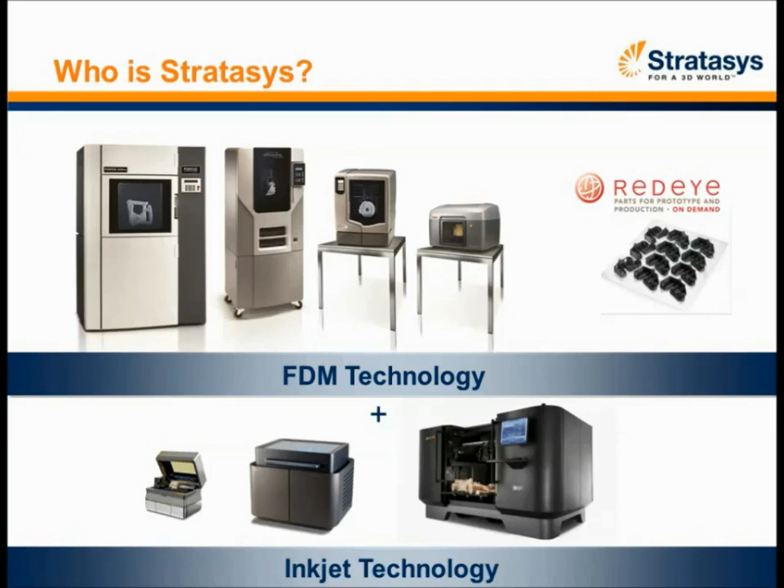Before we get into today's topic, I wanted to give some background about who Stratasys is. For those who may not be familiar, Stratasys makes 3D printers and production systems based on patented fused deposition modeling technology, or FDM, that can produce prototypes and production parts directly from 3D CAD data using engineering-grade thermoplastics. We also operate RedEye On Demand, an online rapid prototyping and digital manufacturing service. You may have recently heard that Stratasys has merged with Objet, also a manufacturer of 3D printers, but they use an inkjet-based technology to create a 3D model.

I'd like to welcome our presenter today, Mr. Duane Byerley. Duane has over 35 years of experience as a senior model maker. In his current role at the Xerox Model Shop, Duane builds everything from complicated multi-plate injection molds and tooling to multi-surface CNC work, welding, and sheet metal fabrication. He's also the in-house advisor of rapid prototyping and machine services. In 1998, they bought their first Stratasys FDM system, and over those 14 years he's been heralded as an industry expert in the field. He was given a Lifetime Achievement Award for excellence in FDM and has been a presenter at the Additive Manufacturing Users Group Conference, as well as SME's Rapid event. So welcome, Duane, we're glad to have you on board for this presentation.

Well, thanks, Kim. Thanks for having me.

Now on to the meat of today's webinar. I'm going to review a little bit about what additive manufacturing is, then talk about manufacturing tools, what they are, how they're traditionally made, and then how making them with additive manufacturing can help processes and what that brings to the table. After that, we'll hear from Duane about the history of the Xerox model shop and everything he's using additive manufacturing for, specifically the FDM technology.

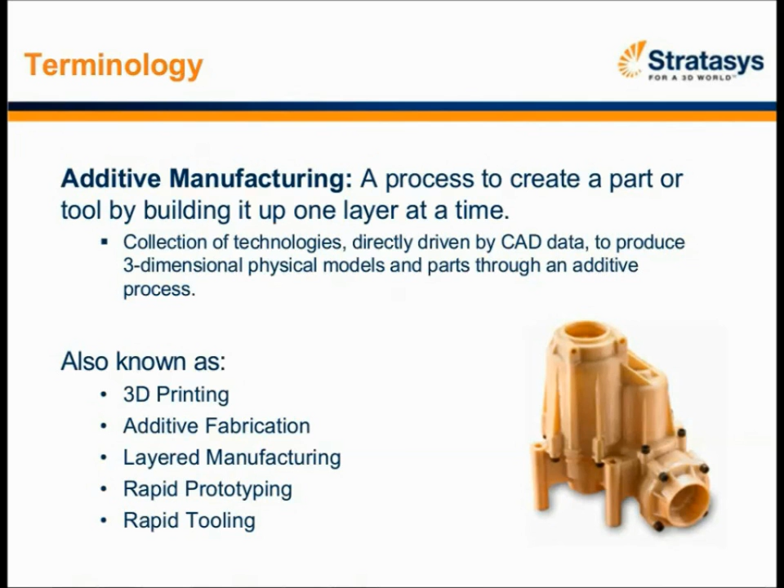We define additive manufacturing as a process used to create a part by building it layer by layer from the bottom up. There are several different technologies that fall under this category of additive manufacturing. As I mentioned, fused deposition modeling, or FDM, is one of those technologies, which is what we'll mainly be talking about today. Additive manufacturing also has many different names, and it's basically synonymous with terms like 3D printing, rapid prototyping, rapid tooling, et cetera.

So specifically, we're going to talk more about manufacturing tools. People aren't just using additive manufacturing for prototypes anymore. They can be used for form, fit, and functional testing. They can also be used for manufacturing tools and even low-volume end-use parts.

And they come in many different materials in all shapes and sizes, and range from simple to complex. But all have one thing in common: they're used to produce a quality product as quickly, affordably, and repeatably as possible.

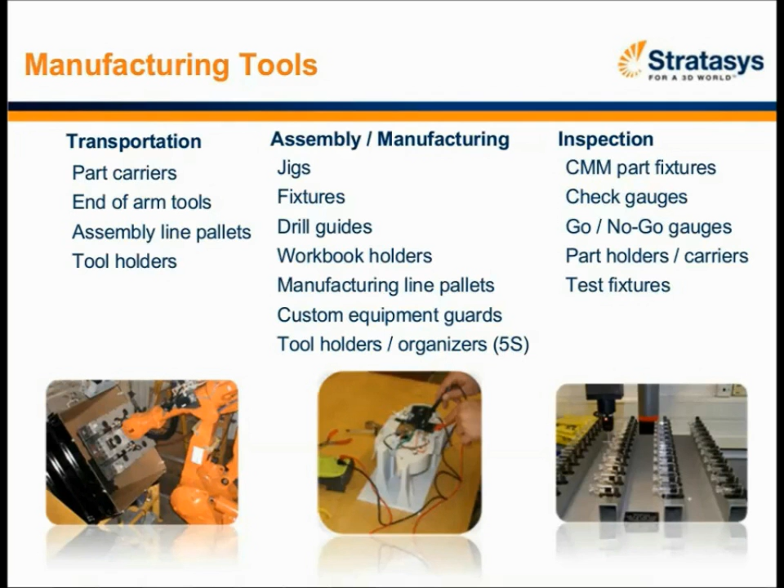So let's talk a little bit about traditional processes of creating manufacturing tools versus using additive manufacturing. They're traditionally machined or fabricated from metal, wood, or plastic. Like the items they're used to produce, these tools also need to go through a design, documentation, and production process. On average, production of a manufacturing tool can take 1 to about 4 weeks. This means the process can be slow and expensive, even if the design is kept pretty simple, which isn't always what's right for your tool.

Also, as part of the traditional process, you need to wait for delivery. Once you get the tool back, you need to inspect it and test it in the manufacturing process itself. If it's not acceptable, you need to make design changes, return to the vendor for a new quote, and start the whole process over again, getting it manufactured and sent back to you. Then you repeat design iterations as required.

So given all of this, there are some definite advantages to traditional processes, like it's a proven industry standard. Surface finish is typically very smooth. And at high volumes, it's actually pretty easy to justify the cost. But with all the steps in the process and with so many people involved, it's easy to see why conventional methods for manufacturing tools can be slow and expensive.

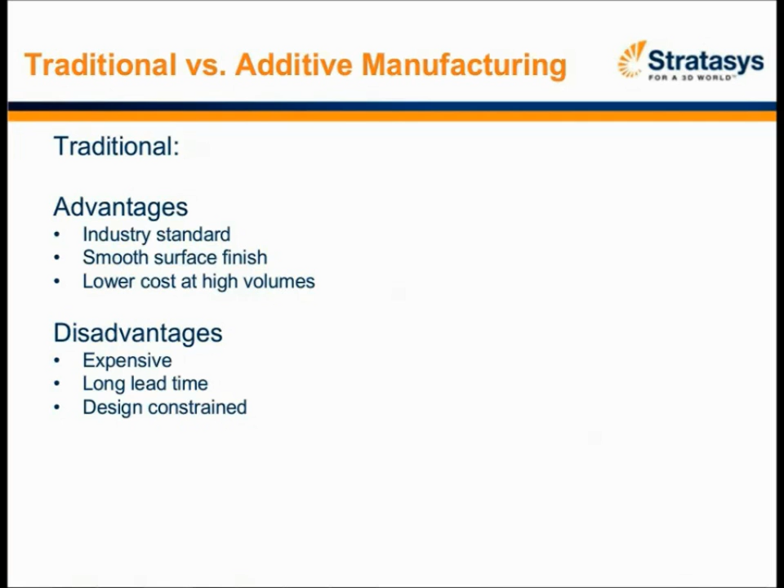And this is really where additive manufacturing comes into play. Additive manufacturing offers an alternative method for producing manufacturing tools. Instead of cutting, bending, shaping, and welding a jig or fixture or guide, additive manufacturing constructs the tool from the bottom up using a layered process. It creates just what you need. This eliminates a lot of steps in the process, cuts cost, cuts lead time, and labor hours. It also removes the constraints of how you design the jig or fixture because it is an additive process.

So what's involved with making jigs and fixtures with additive manufacturing? First, you're designing your part in CAD. You're outputting an STL file. There's no detailed drawings required. You either get the manufacturing tool built out of house or through your own system, and go ahead and make more than one at the same time. You can fill up the build platform as much as you need.

After the build is done, you remove the supporting material, and then you can inspect and test the tool. If it's correct, you send it onto the production floor for immediate use. If it's not correct, you can easily iterate and change your design and get more printed out fairly quickly.

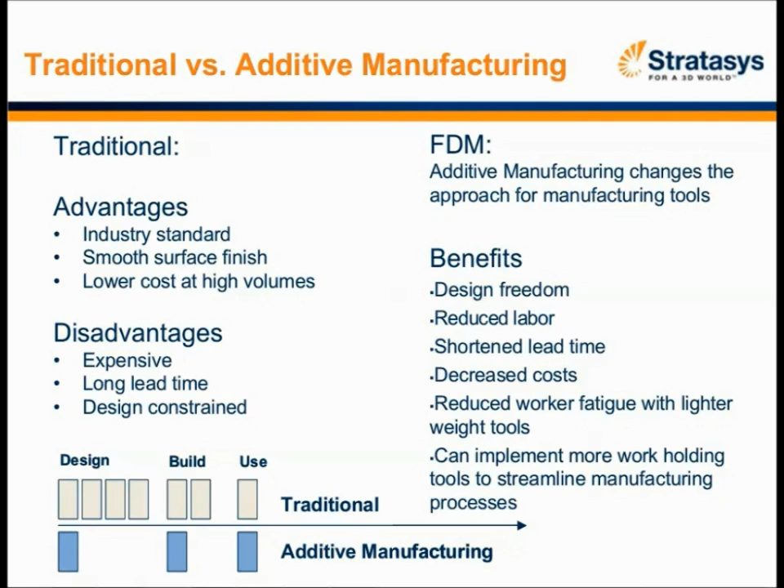In addition, after a tool is created and in use on the manufacturing floor, you'll probably notice reduced worker fatigue due to the lighter weight tools. You can design tools so that the internal structure isn't a solid fill—it can be a honeycomb structure on the inside to reduce that weight. And you can implement more and more work-holding tools to help streamline the manufacturing process.

So the Stratasys manufacturing facility today uses over 350 jigs and fixtures on our production floor, and more than 30% of those jigs and fixtures are FDM. So we're trying to practice what we preach, and it really is worth the savings and the time we're able to realize.

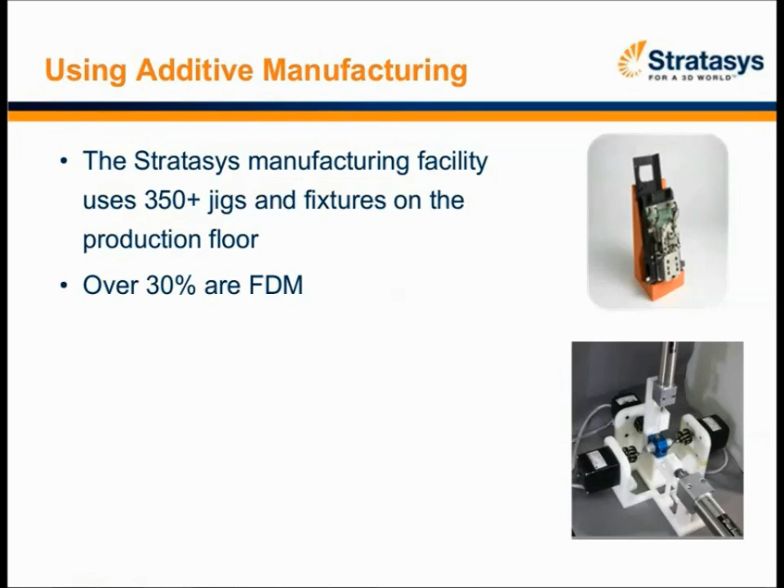In 1998, we started a new printer platform that went from our conventional sheet metal chassis to a plastic chassis that we knew was going to take several iterations to get right. So I started building these on a milling machine, and we started sending out work right and left to the point that at the end of the year, I was told I sent out $1.6 million worth of RP work, mostly just trial fit pieces. So we realized then that we really needed our own process, and being an engineering background, I want to make sure that it works for us. I want to make sure that the part I'm getting is going to be the same two months from now.

And so that sort of limited it to FDM and possibly an SLS process. We had a world-class machine shop, and we can knock out parts pretty quickly, but we knew that wasn't always the fastest process. In terms of the side frames, where I would laminate blocks of plastic together and let it dry and then start carving on it, it would typically take me at least a week's worth of machining on sometimes six sides to get things right. In the meantime, I've got 128 engineers who are already doing rework. By the time I'd get that done, they had 3 revisions that I needed to cut in and glue in and start all over.

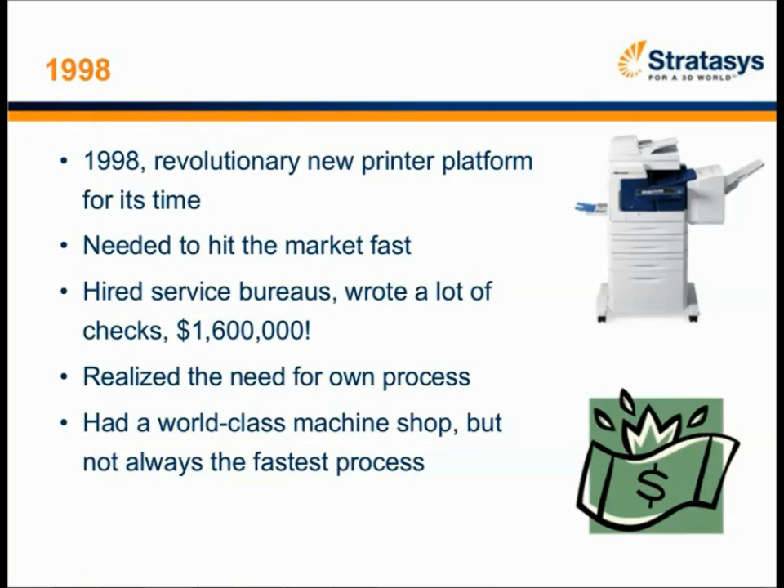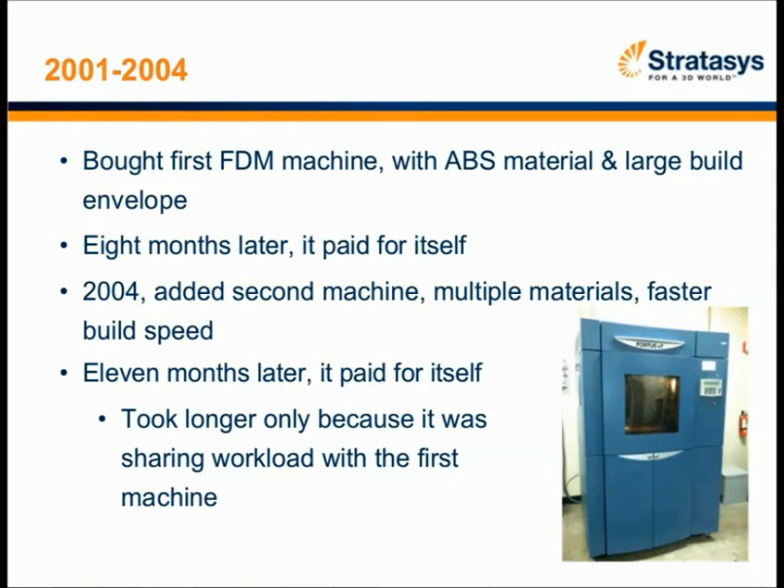When we bought our first one, it was a Maxum, which is no longer made, but it had a nice big build platform. It only allowed us ABS. In spite of people maybe wanting a little different material at times, 8 months later it had paid for itself. In 2004, as we were winding up that platform and starting our next one, we added a second machine that allowed us to go to polycarbonate. At the time, we had PPSF and PCABS—several materials that we liked to use. It took 11 months to pay for itself, but only because we had 2 of them now sharing the duties.

From a tool and die maker standpoint, I make a lot of parts as well, but I kept looking at these FDM parts and looking at fixturing, and anyone in the industry knows that fixturing is often the most expensive part you're going to build because it's a one-off. You're not capitalizing on having the same setup for several parts—you're pretty much into that one part.

So I started looking over the fence at tooling and little things we did—I saw technicians and engineers coming in trying to push gears onto things that don't stand up, or trying to keep something flat. When you fly cut something, you need to relieve the stress on both sides, so it starts to potato chip, or you try to lay it back down. What we found with FDM is it's basically put together like plywood in layers, and I've had wringing fits on my bench plate from the parts being so flat.

So that was my first shot, to see if it works. And of course the engineers and everybody said, oh, it's not going to work. It does work—it works really well. As we develop a product, it goes over 2.5 to 3.5 years of cycling and testing and so on. The parts change, and oftentimes the fixturing would have to change. So instead of bringing them back, setting up something that's all bolted together and doweled and precision, and then trying to figure out how to hold it, we'd simply print a new one.

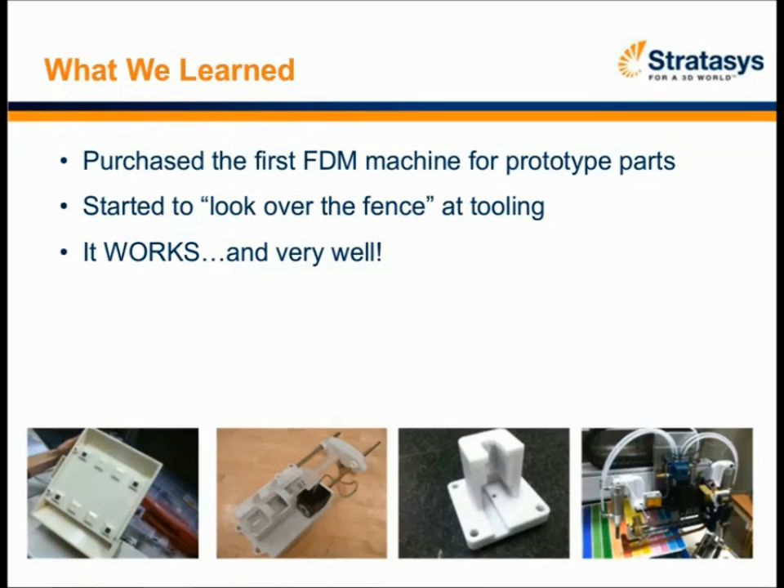And as the part was updated, the fixture was updated. So as we send those back to the technicians, the file is updated and kept on hand, so that by the time it gets to the actual production, we've got the fixturing already ready to go for them.

So lately, we just kind of run with this whole thing. We get a lot of custom printers as well. We have a client base where we use a lot of custom defined printers.

We had one order where we were going to make probably a life cycle of maybe 300,000 printers of a particular flavor. When we went to get a connector that would allow us to use existing cabling, we were told it was going to take 1 million units for them to retool. Paying that, or throwing them away, just didn't set well with us. So we looked.

We had an existing connector that if we removed, it made a little window so some clips would clear, and pushed a couple pins out so we could make it work. We needed 350 connectors, so I made a quick little steel rule die.

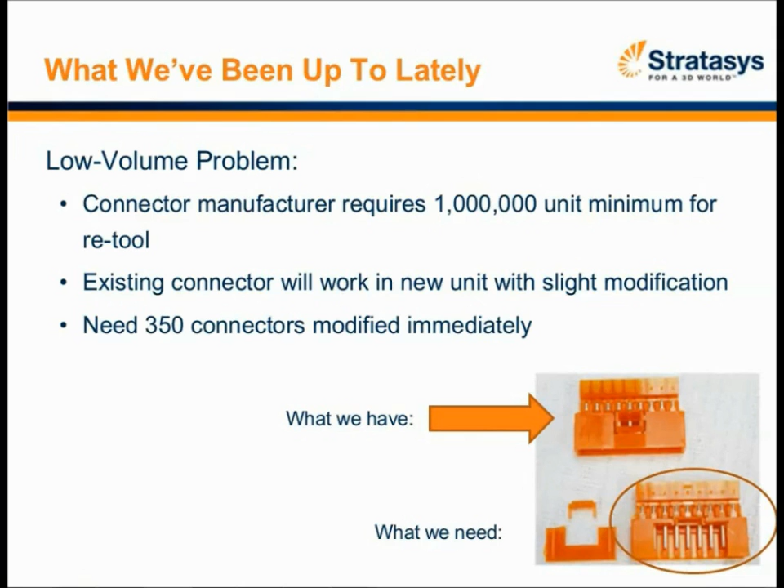The next slide shows the process I used. I made a little core that would keep the connector from collapsing. I took some standard chisel point X-Acto blades, put them into a little holder, made a little guillotine press, took it over to my toggle press, and started punching these things out. By the next morning, they had their 350 connectors so they could start testing right off the bat.

What we found is, for about the first 4,000 or 5,000 printers we delivered, they were made with the same process. We didn't have to go back and revisit this. We simply used the little FDM tool I created for the prototypes.

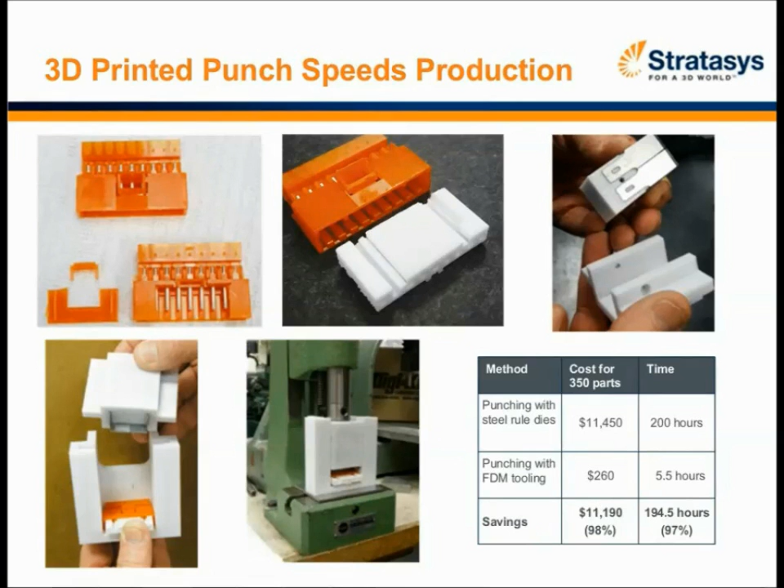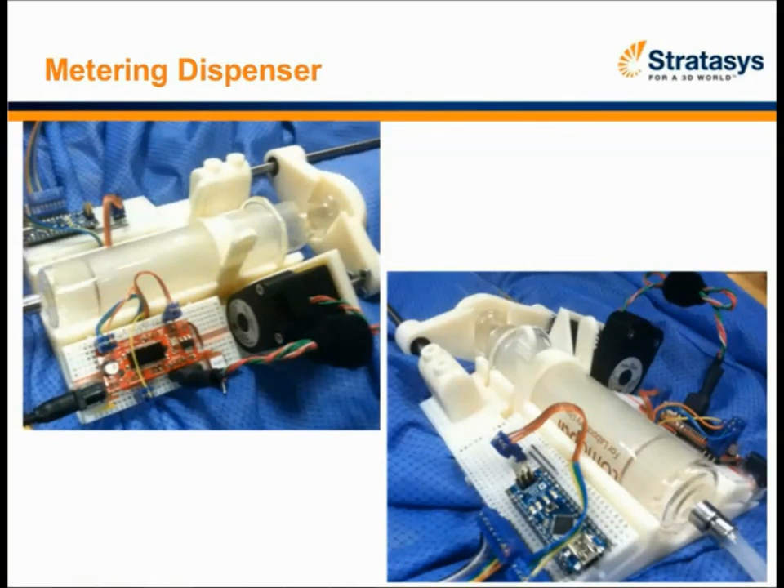The next slide shows a metering dispenser. We get a lot of college interns, and I love them because they have no concept of what it takes to machine something. It's like watching my 2-year-old granddaughter play. She has no limits to what her imagination will come up with.

So this metering dispenser was a great idea, but the problem was it was almost unmachinable. The more we looked at it, we said, well, why don't we make it out of FDM? Because it doesn't care if it's got all these weird little holes and sharp corners down inside there.

Everything dropped in, and we made probably 60 of these little metering dispensers. The syringe clips in and out so they can load it, and it drops right back in, and precisely dispenses whatever it is, either silicone oil or adhesives or whatever, inside.

Well, if it slips or moves, the little encoder disc gets broken, or the electronics get damaged, and it no longer works. So we were throwing these things away by the dozens, and I made a quick little fixture. I just put a steel set screw up from the bottom that we could adjust for the right fit.

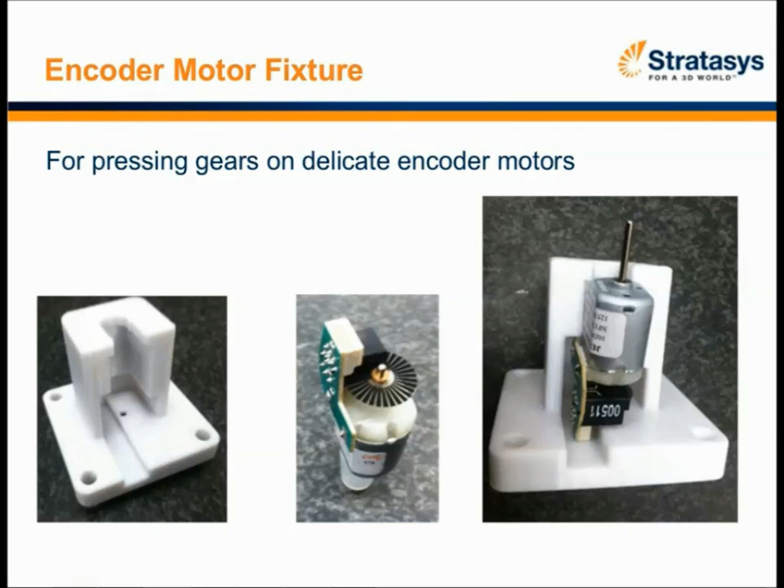I put holes in it for the second version because they were putting a little steel plate on it, and they had some magnets, and it would just clip into the magnets and align each time. We've probably done a dozen different motors this way.

The little unit he envisioned, in order to make it toggle and kind of flex and be adjustable, had internal dovetails, long—about 6 to 8 inches long, maybe—with these long arms. He submitted it as a machine part initially, and we looked at it, and we weren't sure if FDM was going to be quite accurate enough for something as precise as an optical scanner. But we thought, well, at least let's see if the concept's going to work.

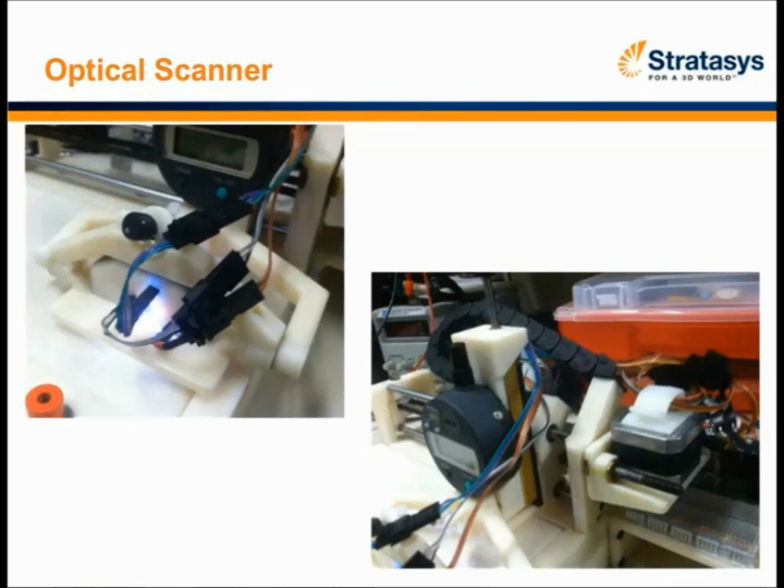We put it together, and it measures down to micro inches—it's sub-micron level inspection on these things. So actually, when we got it together, I had to take my hat off. It's very ingenious the way it worked. I have no idea how you would ever make it outside of something like FDM.

This is a camera dock that we use. We use high-speed photography for testing fluid flow. In the big frame there, on the right-hand side, you can see the gear section. We have a hand crank and also a little electric motor, and we're dialing it down to sub-seconds of angle.

Obviously degrees, minutes, seconds, and we're down to sub-seconds just to see if it makes a difference, because if somebody were to park our printer on an uneven surface, we need to know if it's going to change anything. So we run a wide variety of testing with this. We could run it at 180 degrees if we felt we needed to. The frame out in the middle is simply a threaded plate off of the flat plate that allows them to get underneath and attach things.

FDM worked great for this. Almost everything you see in this picture is FDM. It has a camera mount on the left-hand picture there. You can see the microscope camera, and it sits on a fully adjustable FDM camera base.

This is some detailed shots. One of the things we heard over time about FDM is that because you soak off some of the support material in various solutions, it absorbs moisture. So the thought is, well, it must leak. If you made a big box out of it, it's going to leak.

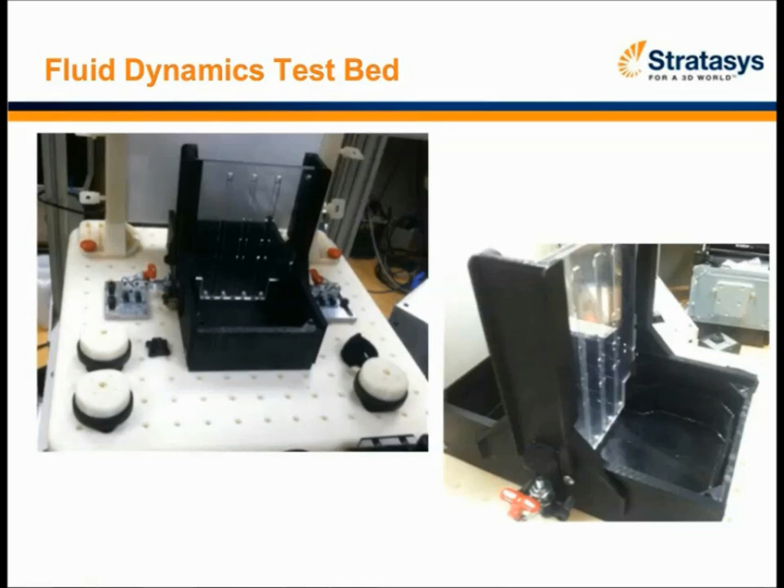This slide is just a general sampling. We'll often take one platform, put new software and new controller boards in it, and add different features. While they're in prototype stage, the question is always, what do you do with them? Do you just lay them out on a table here? Well, they're portable—they go from one technician to another or to software people.

The many pieces this was going to be, trying to fit the guts of the new controller boards and such, power supplies, down inside there—it was about 20 different parts. I said, well, in respect for the time we have here, let's just get an FDM version of this thing and trial fit it.

In the right-hand picture, you can see a long groove along that whole thing. It just drops down on the sheet metal back panel, and it holds everything, and the components slide right in. They're put in with a couple of screws, and they can take them off—just detach them, set them aside, and drop them onto the next unit. There was no point in trying to make this into many different pieces, so we made it all one piece.

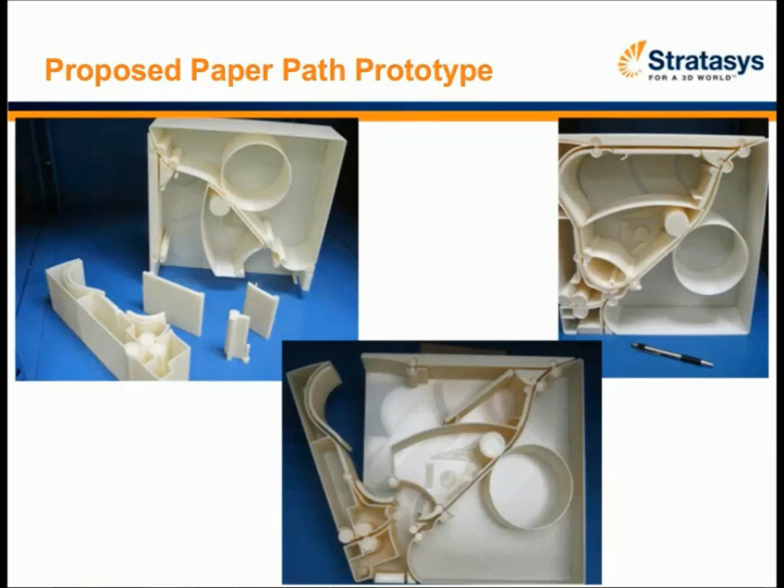This was just a thin version, probably 6 inches deep by 2 feet by 2 feet, but it allowed them to take paper and run it down through there and flip all the little flippers and different levers to route the paper, to unjam the paper. In one design review, we were able to completely set the architecture for our latest printer.

This is my latest success story. I love this. As a machinist, as a tool and die maker - these little strips are probably 1.25 inches by 3 inches long, and they're vacuum chucks.

With our print heads, there's over 1,200 orifices on the face, and they all spit ink independently of each other. There's a little flex circuit on the back that has to be precisely aligned under a microscope and fused on, so that when the electrical impulses hit, it oil cans and spits out the droplet of ink.

In order to attach these delicate flex circuits, we've machined these out of stainless steel in the past, and you've got a lot of deep drilling. You've got tight corners you can't overcut or it would leak, so we would water jet ceramic sponge. But since I've done a lot of thermoforming, I worked with Stratasys on thermoforming.

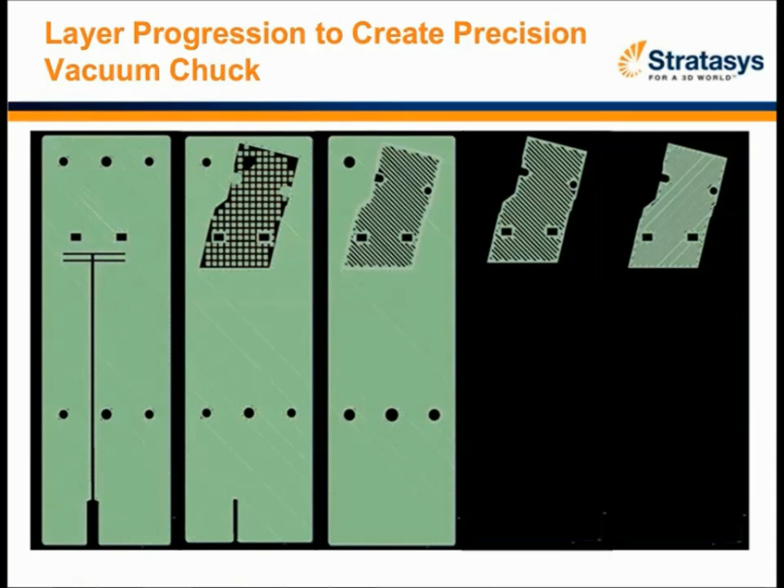The little rectangular holes you see about a third of the way down, those are microscope holes. We look through a precise microscope at some fiducials, and we have to line that all up. This aligns them as well as anything we ever machined.

On the very far left-hand slide, when I was working with the application engineers on thermoforming - basically what we do with thermoforming is make little transparent shields or holders for sub-assemblies. Our heads are put together and dropped into little dishes, basically, for protection, then sent on to the next site.

So we make a lot of thermoformed covers and holding apparatus, either for the production line or for our sub-production line.

When we didn't have this, Stratasys didn't know, and we didn't know what the magic number was for putting porosity in it - how much is it going to take in order to suck through it? I know when I made them and had to drill all these 30 thousandths diameter holes, it was always a headache.

You could spend a lot of time shaping a mold, and then when you went to drill the holes, you'd break the drill, and you'd have to grind it off or get it down flush and start another one right in close to it - that took more time than building the mold.

So this way, it builds it with porosity. On the top picture, I put a light bulb behind it - you could literally read a newspaper through our first couple of attempts. What we found is it doesn't take much porosity for it to be the best thermoform material you'll ever use.

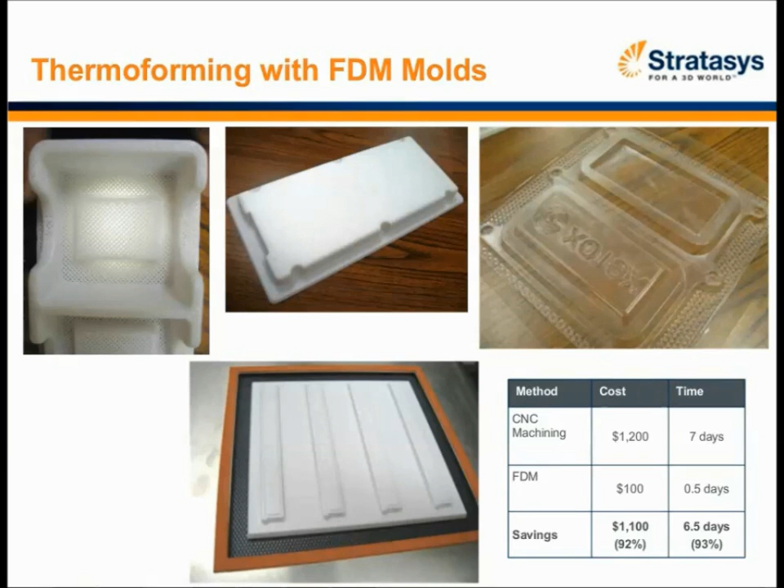So when we assemble these heads, we could instantly snap these clear covers down over the top, so they wouldn't pick up debris or grit or any fuzz in the air, since they're put together in clean rooms and then transported out onto the production line. Somewhere between the clean room and the production line, they were getting dirty, so this was a huge win, even though it was a pretty simple fix from my standpoint.

Final thoughts. Various people, as they get ready to retire, do something of note. They want some cool wall mount switch plate for their light switches that signify they're part of a particular group. We knock these things out when we have space on the machine.

Our site president happens to be an antique airplane collector. He has a Grumman Hellcat. I talked with one of the applications guys back in Eden Prairie, they found a model of that and digitized it. We made a scale model of that to put on his desk, and he was thrilled with it.

But he said, I want a nameplate made out of this. So we made a nameplate, and on his desk, when all the hot shots from wherever come in to visit with him, his nameplate that could be polished brass is FDM, and he believes in that. So far I haven't found anything I can't do with FDM. I believe in it.

I started opening my mind to just, if I'm doing it this way and I'm machining it, how can I make my life easier? One thing that I think is really important to get across is when I log the job hours down, it might not look a lot different to do it in FDM or in a machine, but the possibilities are more, number one.

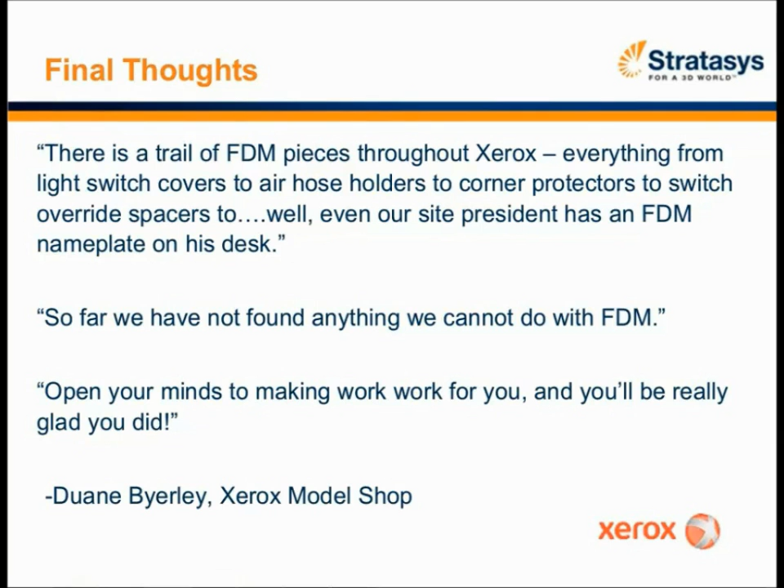And that's kind of cool. They don't call it a 3D printing mock-up or an RP mock-up. They call it FDM, they call it what it is, and they're so sold out to that it would be hard for me to try to get a different process in here.

That's about all I've got.